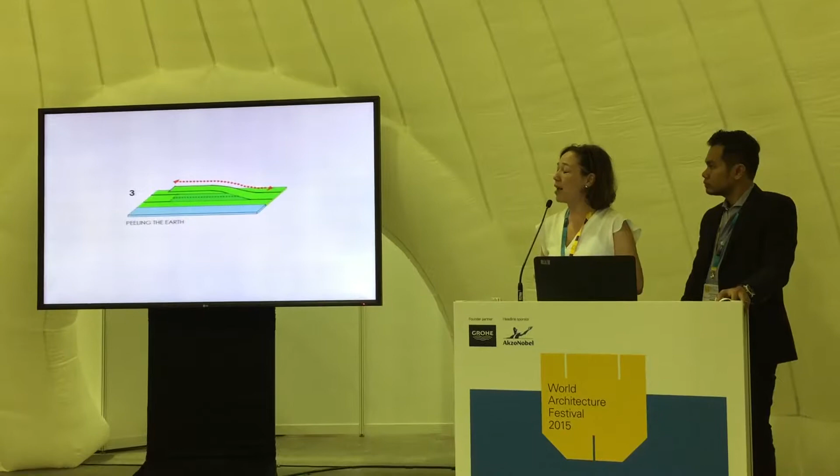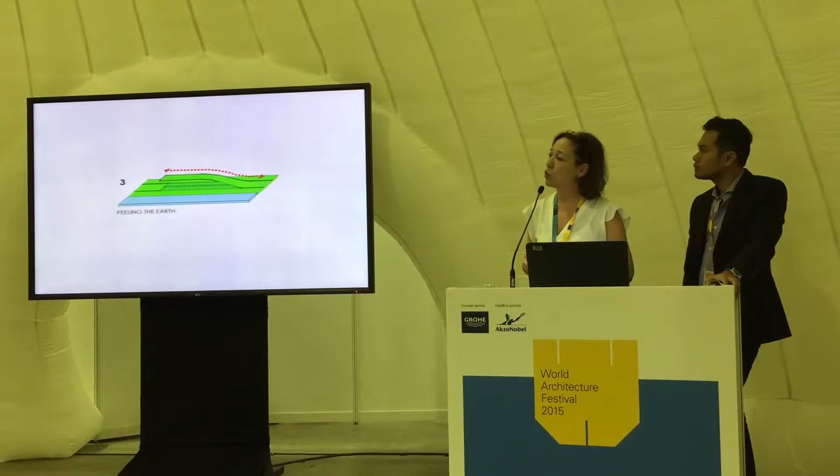The building is built in 2 parts. So in the first phase, we have actually built 3/4 of the curve of the arc, and we have another quarter to go. In the brief, we were to house 3,000 students. At the moment, we actually house 4,000, and in the second phase, up to a capacity of 6,000 students. So that's quite a lot of students in one campus.

And this was our concept when we first gave it, and of course there's been some development since the time we put in the concept. The concept was a series of buildings below the green roof going over the top. So in terms of the site, that's where it is in Putrajaya. It's next to the convention center.

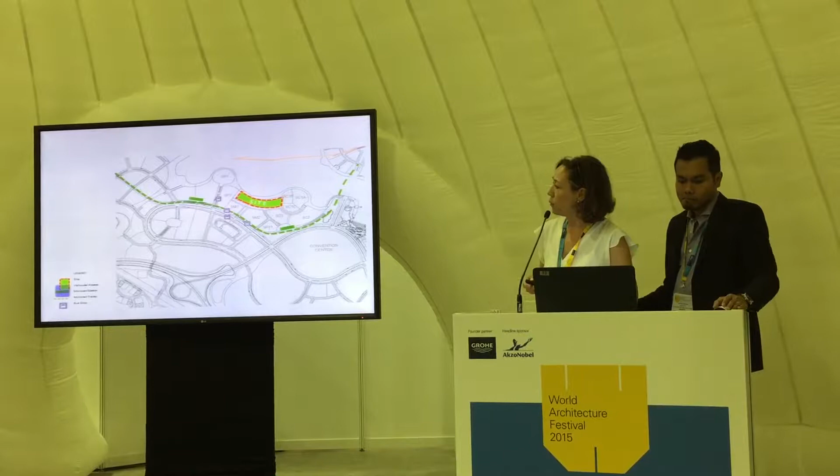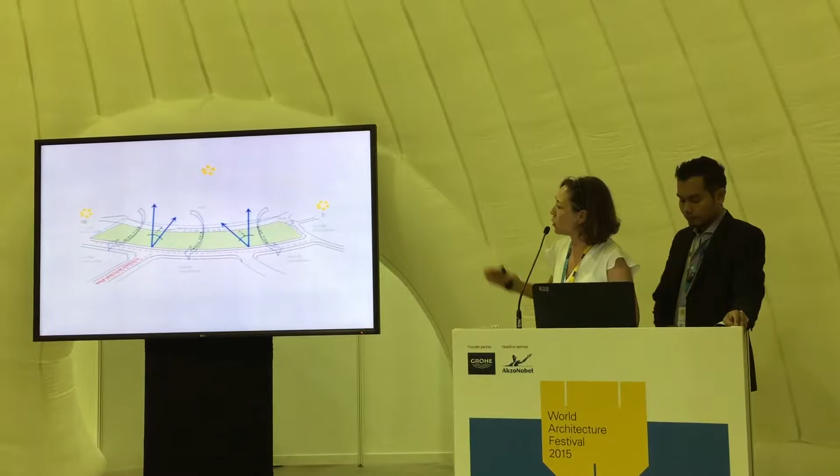There were some requirements in terms of retaining some views from the streetscape that was given to us. So all the roads that are coming in had to have clear views to the waterfront. So we had to create these axes that you see, these view corridors through the building.

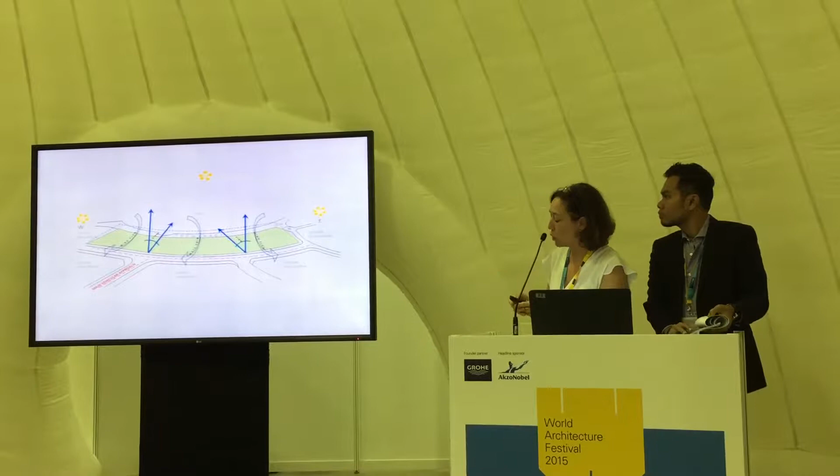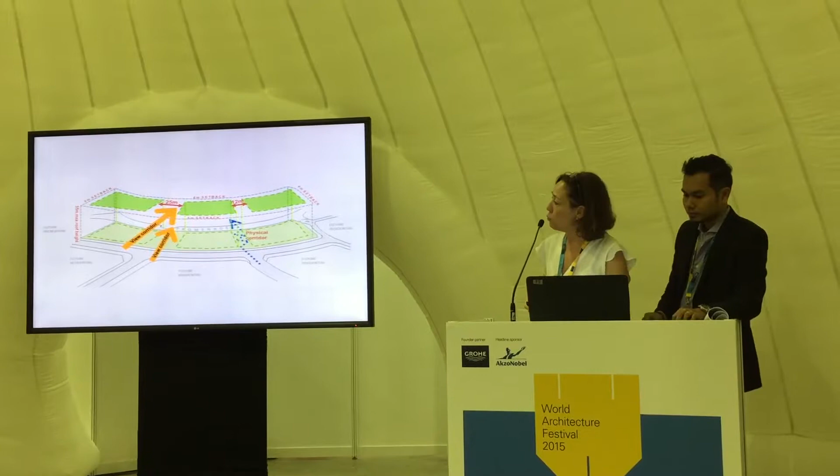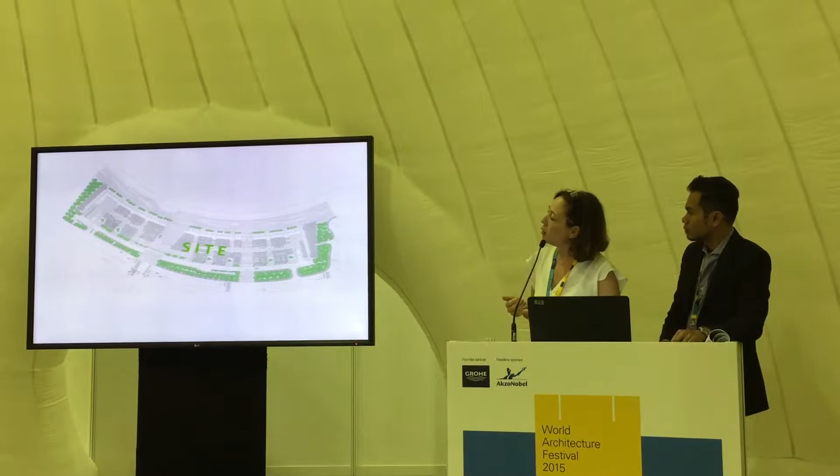And taking that as an idea, we began to break the building into a series of smaller blocks, individual blocks below the roof. So this is in terms of planning, and you can see that there are individual blocks, and in the middle there's an internal street. So the internal street is shaded, and there's cross ventilation at all the spines that you see and the breaks that you come through. So there's cross ventilation from the water side.

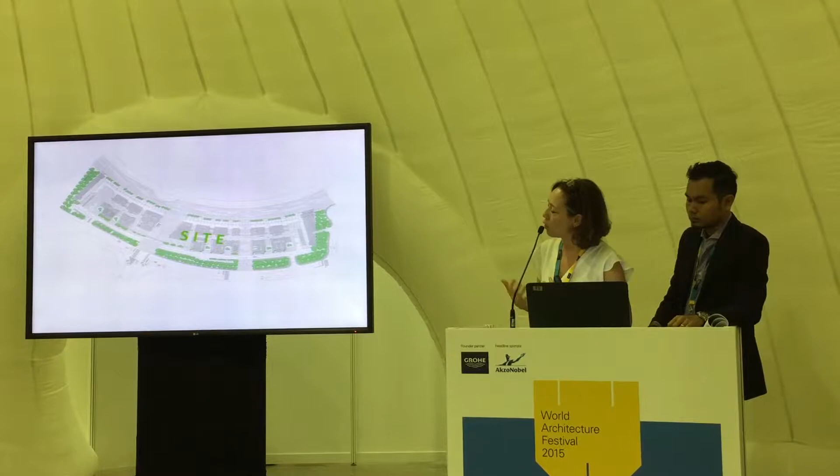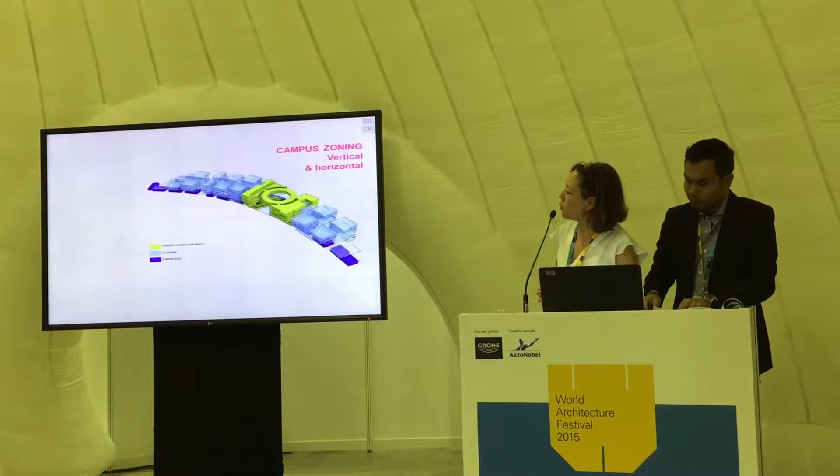And the thing about being near a water body, it creates cross flows of air itself, because the water and the land heat up quite differently. So these axes that you see as breaks in the building open up. And this was the original planning of the entire campus in terms of building it.

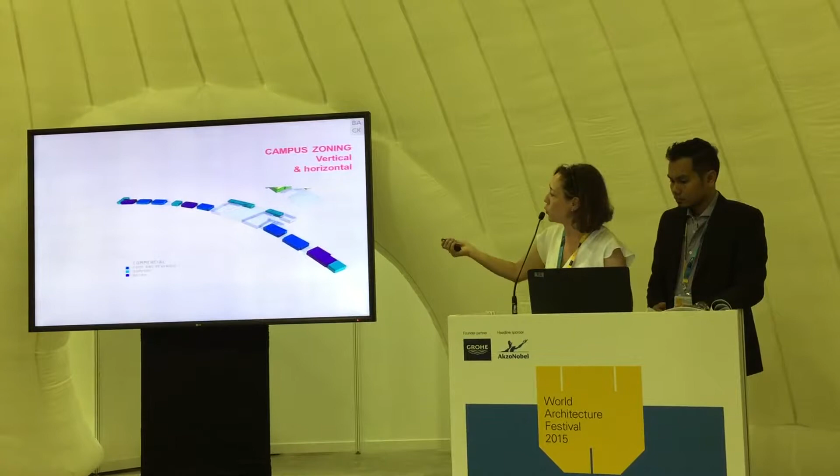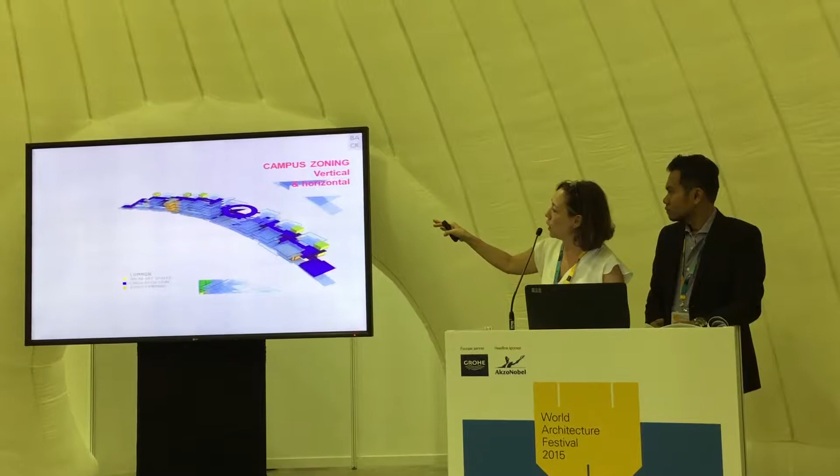At the waterfront, we basically have a commercial esplanade, so all that you see there on the waterfront edge are the facilities for the students. And then on top of that are the zones for the learning centers. And above that, as you can see in purple, that's the internal street linking and staircases that take you between floors. So the building steps up from 2, 3, 4 to 5 stories, so there's a gradual increase going to the center. And then, of course, the administration and the M&E facilities are on top of the building itself.

At concept, we had a circular ring in the beginning, and of course that was taken out in terms of value engineering. But that still became the nucleus and hub, because that's the main entry, and you will see all the main facilities of the administration and the student center around this main entry point where you come into the building.

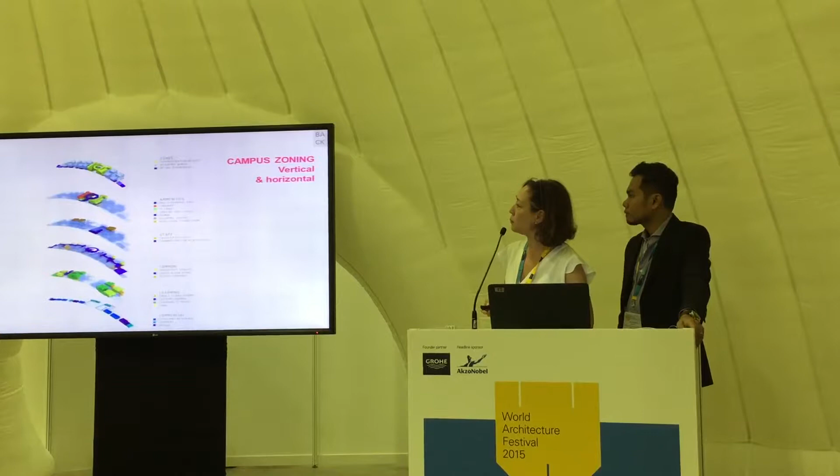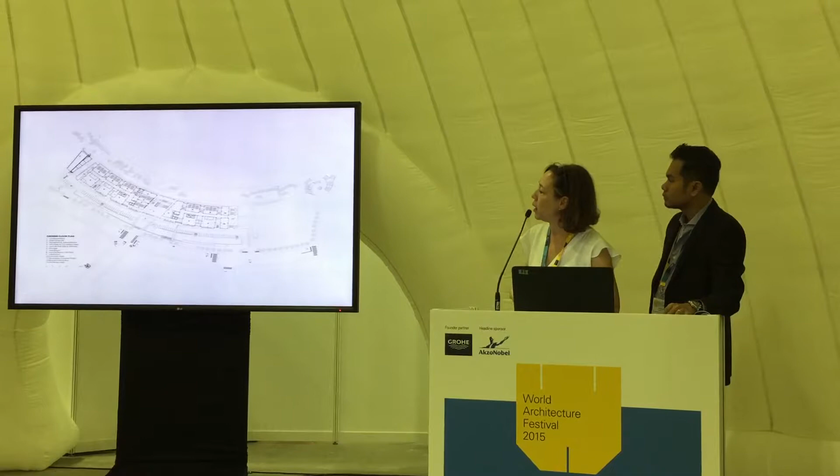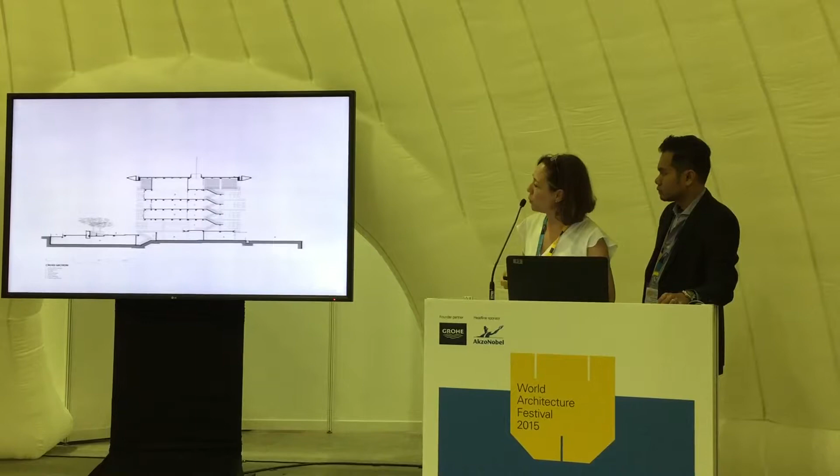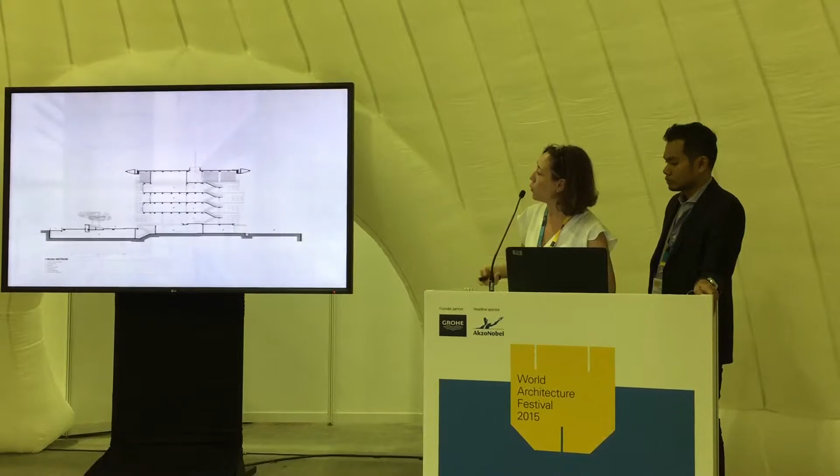This is the rooftop edge, as you can see. And then below that is where the M&E services are, and you can see the skylight and the walkway coming through. The thing about tropical design is that we have to be mindful about water penetration into the building. Once we have big roofs and cross ventilation, we have to allow for the circulation. This has become a real events backdrop to the design.

On the waterfront, they hold... I'm quite afraid time is running out. Okay. And just in terms of the sustainability components, these are some of the features. We are collecting all the water for irrigating the entire... I'm sorry, we have to stop. All right. Okay, thank you.

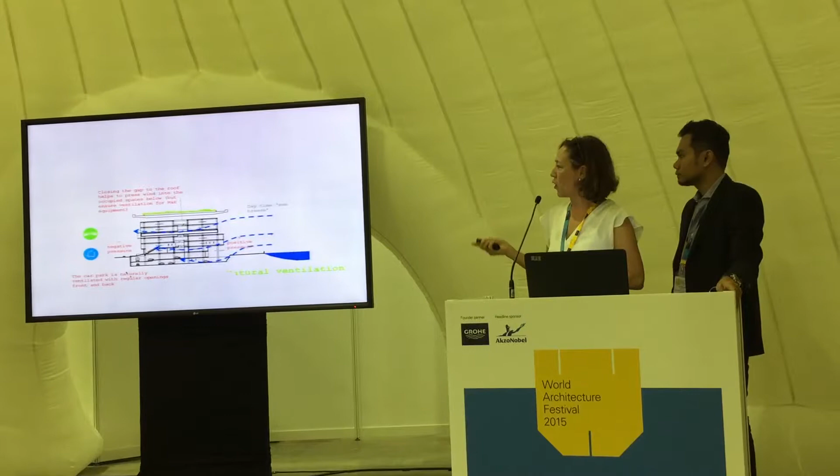Thank you very much. It's a very interesting concept. You mentioned earlier that you saved a lot of the land to keep it green, and as I understood, that was the rooftop. So, is it accessible? Totally accessible, right from the bottom to walk up, or up the lift to be on top. So we've seen a lot of images of the building, not so much of what's actually happening on the roof. That's the roof? That's the roof. Okay.

Do you have any other kind of landscape treatment apart from what we see on the images? No. You mean in front we have all the greenery that we've done as a buffer. Of course, we had to plant the trees. As you saw, there was nothing there. So they haven't become mature, but they're all indigenous trees, of course, and they're supposed to mature to become canopy trees. So all the trees that we've selected are canopy trees.

So this is because it just completed quite recently. In fact, it's just been in operation this year. Then you mentioned the view corridors and the streets. We can see the one in the center that's open with the stairs. Yeah. How about the others? Did you keep them as well? Yes, all the view corridors are maintained. And they are open outdoor space? They are open outdoor spaces, yes. Thank you.

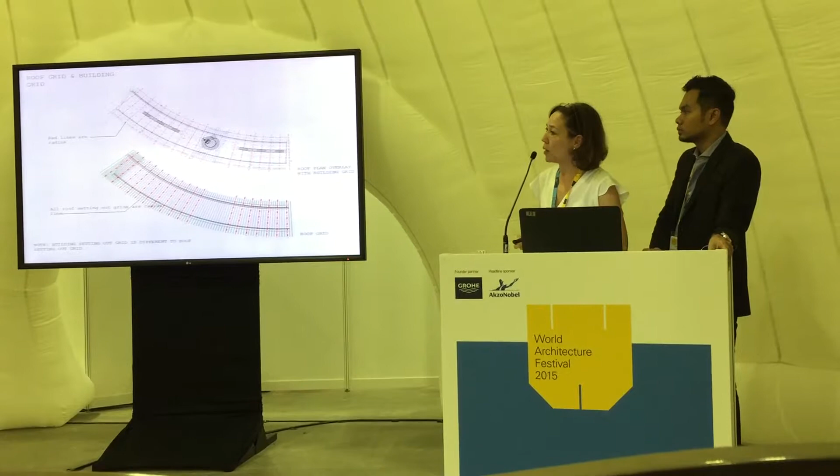Just following up on this one, the view. I like the fact that you had a green roof and it's accessible. Given our very hot tropical climate, what's the reason why you do not put plantings like trees on the roofscape? Because I believe this is not going to be very well spent unless it's only in the evening or early morning. It's going to be very hot.

That's true, but the complexity of building the roof was that we had to create a lot of breaks on the rooftop itself to mitigate the soil from eroding and from the water, controlling the water flow on the roof. So adding the trees would have added quite a big load on top of what is already an arching roof that's going across. So yes, it will be mostly used in the evenings.

And also we have to bear in mind practicality and maintainability of having a large roof with a large cluster of trees. So we have to actually have a balance between structural consideration and actual use. It's the university that maintains it. Actually, we had propagated the idea of doing food planting on top of the roof, which they can do. So not so much in terms of trees, but they can actually do food planting on top of the roof. So we had actually given that to the university, but the university is actually quite careful about maintaining it.